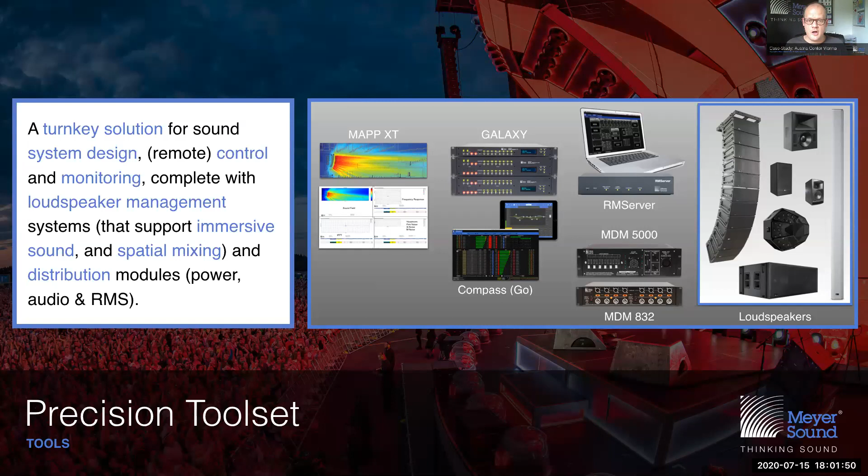And that means that we have another chapter that evolves around the precision toolset, which is our turnkey solution all the way from design to deployment, our turnkey solution for supporting the loudspeaker products. And that means that in today's case study, we get to see again the application of the precision toolset. And today's case study is the Austria Center in Vienna.

We have many guest lecturers, so without further ado, please allow me to introduce, starting with my co-host. Dennis, are you with us? Yes, I'm here. Thank you, Dennis. Dennis Tholema, Technical Service Manager International and fellow Meyer Sound colleague. Thank you for joining us, Dennis. As well as Michael Pohl, also of Technical Services. Michael, are you with us? Hello, everyone. Thank you for confirming. Happy that you're here, guys. You also brought some guest lecturers, namely Manfred Prochazka, who is the CEO of ATEC Pro, our Austrian distributor. Welcome to you, Manfred. Are you with us? Hello. Well, greetings from Austria and happy to be here. Thank you, Manfred.

And then the people that actually work at the Austria Center in Vienna, which is Ronald Wittenberg, Department Head of Event Technicians. Are you with us, Ronald? Hello, everybody. Thank you for the invitation to this event. Thank you very much. Thank you for joining us, as well as your colleague, Karsten Elsner, who is sound engineer at the Austria Center in Vienna. Karsten, are you also with us? Hi there. Nice to be with you. Excellent. Well, that means that we can start having our roundtable. I'm going to cancel the spotlight on me so that every time when you speak, we also see you. And let's start with a brief introduction of the venue.

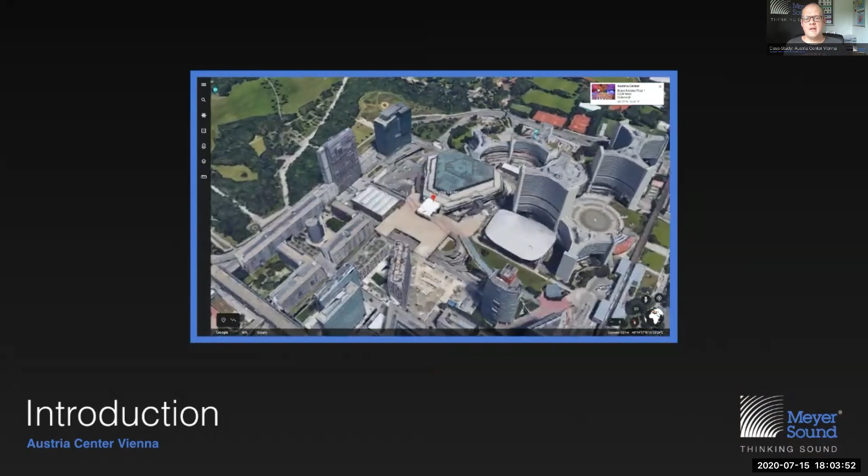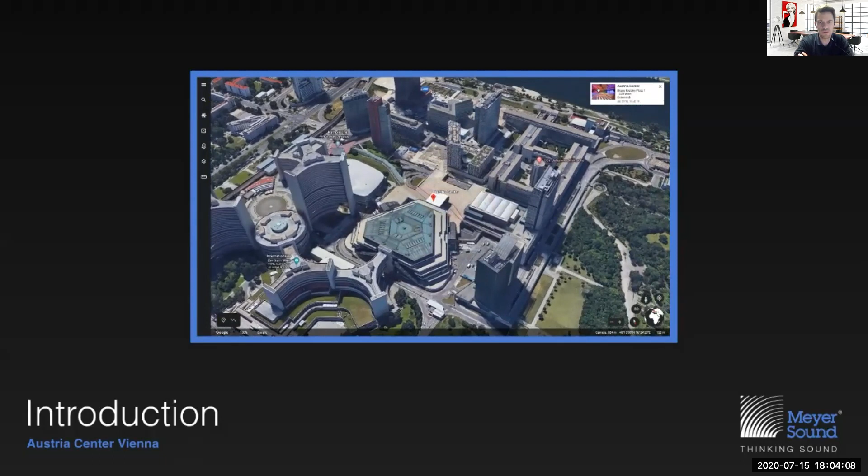Now, Vienna is not in Australia, so I think it's important that we make that clear, that this is a very important venue in the heart of Europe. So who would like to talk a little bit about the purpose and the facilities and the application of this truly unique building? Yeah, maybe I take over at this place. Be our guest. So the Austria Center Vienna was originally designed and planned for the UN. That's our neighbor. It was designed as a conference center for the UN, but then they got their own smaller conference center, and the Austria Center was taken over.

Today we have more or less a lot of international medical congresses in there. This is our main business, but we also have a lot of company events. It's all for bigger congresses. Our biggest congress, for the European Society of Radiology, has about 15 to 20,000 visitors. We have about 24 lecture rooms and about 180 breakout rooms. So it's a very big building with a lot of space in there. But we have a very small group of permanent employees. We have just 5 audio engineers, 3 light technicians, and 3 stage techs. And we have to handle a lot of business in there.

And our main reason why we are here is we have a new sound system installed last year, because the old sound system was more or less 30 years old. I took over in 2016, and I worked in the Austria Center also, I think, 25 years ago as an audio engineer. When I returned in 2016, I entered the main hall and said, whoa, they still have the same system they had 25 years ago, and it's still working. So it was a good system, but it was a little overaged, I think.

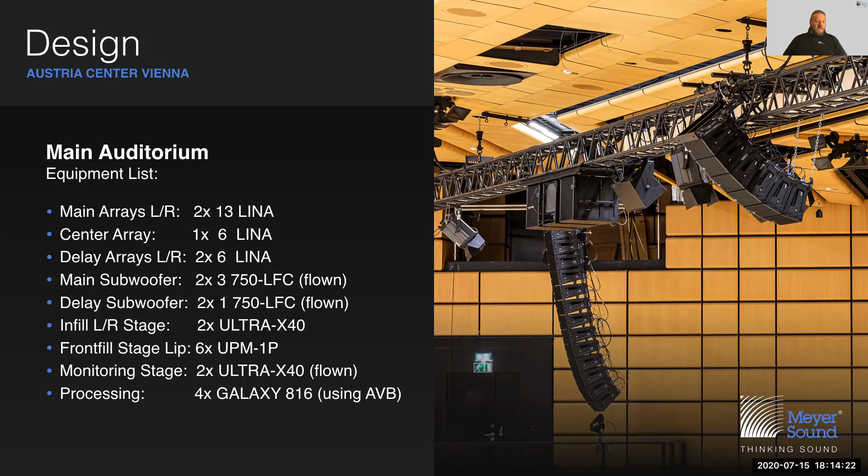That also enables the AV center and the techs to feed signals into the system on every Galaxy and share those signals with all the other ones. And that makes the system very flexible and gives the system lots of inputs. If you just imagine that each Galaxy 816 can receive 8 physical analog or AES signals. Well, AES, it's actually 4 cables, but 2 channels each. So 8 physical signals. And with 4 Galaxies, there's quite some channels that you can get into the system. But let's dive a little deeper into the design and let's check what it is.

So the throw of the system varies a little in regards to the fill systems. The main PA, of course, is on fixed positions. So the picture is taken from one of the very, very last seats in the very last rows. So we are looking now to the back of the stage with 65 to almost 70 meters. But let's take a closer look at the positions of the systems and the main purpose there.

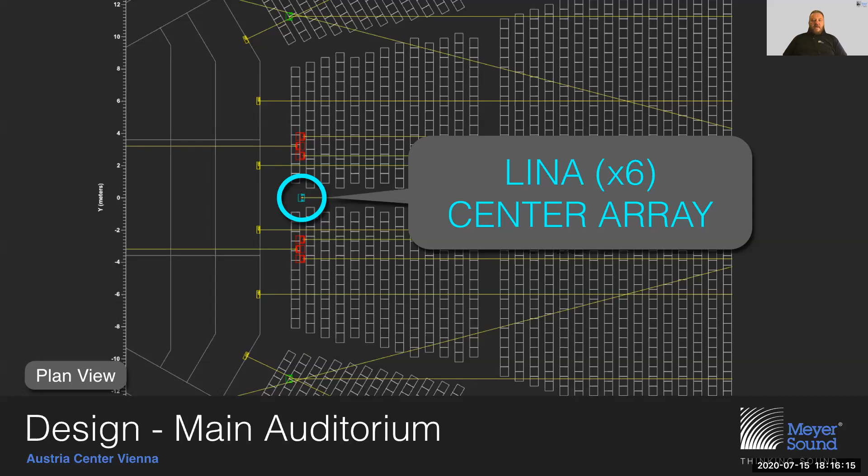Let's begin with the center, which comprises 6 LINAs. This center is not a real center as you would name it in a musical or theatrical world. So the center is not covering the whole venue and all the seats. It is a center fill to actually close the gap between the left and right systems. The center cluster is tilted pretty much downward, as we can see in the next slide here, to literally fulfill the requirements of making a nice transition from the very left to the very right and filling that gap there.

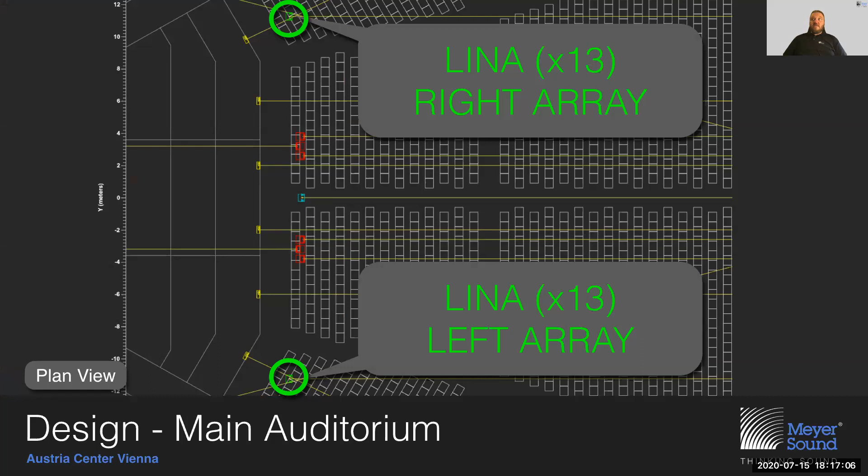In the next slide, we will see the main left and right line arrays, which I already mentioned, use 13 elements each side, which is still a pretty small system. What is interesting is that those systems are slightly turned outwards, so they're not 100% straight. Just also to cover the outer areas, as you saw on the first one, the room is what we call fan-shaped. So it opens up and it widens more and more as you get further away from the stage.

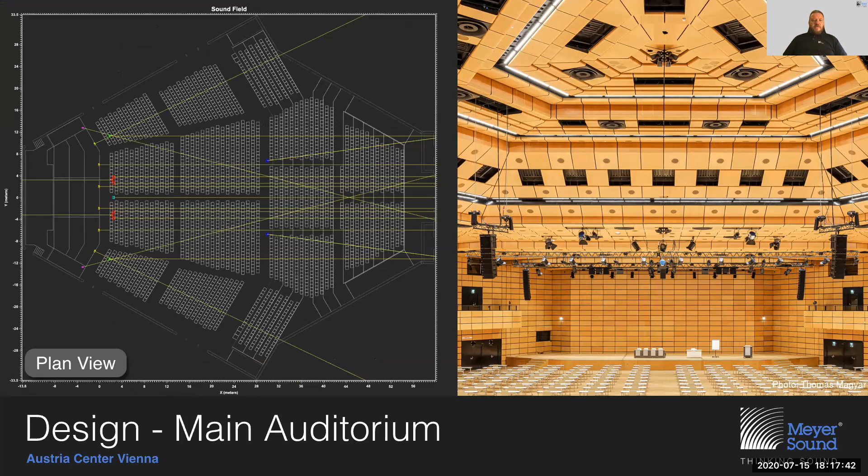Just to make sure that the coverage also meets the very outsides and the outer seats, those systems are not 100% straight. But also very important is that the transition between the left, center, and the right system is very smooth. And we took a lot of efforts to make this transition as invisible, or well, inaudible, so as smooth as possible so that you don't spot when you move from one system into the other.

But of course, yes. I also have to mention that basically the position of the left, center, and right was a given fact. There was a trim level that was desired because they have some gigs in there, some shows, some productions where they have a big video projection screen in the back of the stage that basically defined the left and right position of the main array and also defined the trim height of the center and all speakers that are suspended by the truss, so that at no point any speaker throws a shadow on the video projection. So that was one interesting thing.

Right, not just line of sound, but also line of sight. Correct. Yeah.

Important. I almost forgot about this one. For me, it's still audio first. Sorry for that. But thanks for adding that, Dennis. Of course, that was a very important point to make.

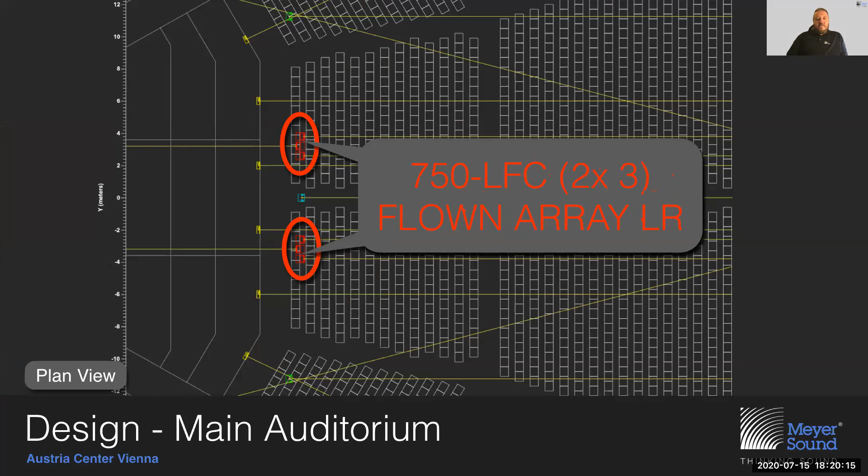As we've seen on the pictures before, of course, a couple of subwoofers are deployed because you want to have a linear frequency response all the way down to 35 Hz or around. In the design, we achieved this with 3 750 LFCs in a gradient cardioid array, a little bit spaced left and right out of the center, which was also given by the loading capacities of the main truss. But of course, you want to keep the stage clean, and you don't want to have disturbance on stage by some low end that you spill there. So that's why we decided to go for gradient arrays in this way, as you can see here.

On the next slide, you see the 6 UPM-1P front fill systems, which are covering the very first 2 to 3 rows in the venue. Because as you can see, the main array and the center are actually placed above the audience area, not above the stage. And as Dennis mentioned, those positions have been given. So a front fill system is very important. And what is also a very important point is that the fill systems that are filling those gaps have the same sonic signature and the same phase and frequency response, so you smoothly blend over from the fills into the main systems without any disturbance.

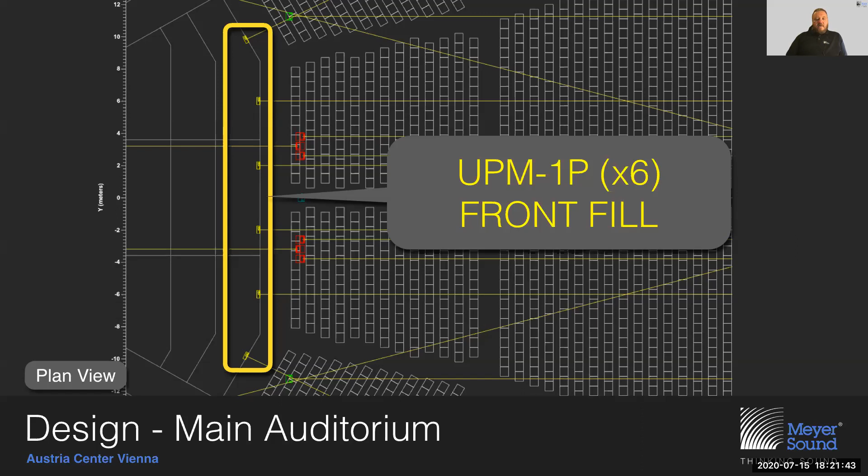As we will see a little later, this also could be read in the measurements from the consultant company, that this transition is really good and that the phase responses of all those speakers are matching, which we also achieved, of course, using the tools within our Galaxy network platform, for example the product integration for those systems to marry them all together, so to say.

For the outer sides, we also wanted to have a little stronger system because, as you can see, the audience area is also not straight in front of the stage to the outsides. It gets a little closer towards the rear wall because the stage is, I don't know, still trapezoidal, but yeah, it's a multi-edge stage. So for those applications, we decided for the Ultra X40s because of their wide coverage, so we can also anchor the signals closer towards the stage.

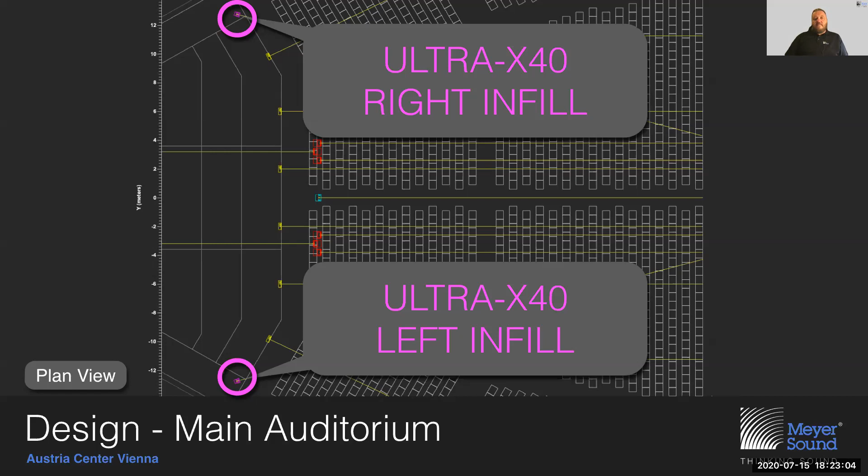You don't want to sit in the second row and see a presenter 4 or 5 meters away from you and hear him coming out of the roof. That's not very nice, and that also is very distracting in regards to concentration if you want to listen to a congress and stuff like this. And those events can take a long time. So that was also a very important part for us to bring the image, so to say, down to the stage. No shower sound. Yes, absolutely.

That's what it is. And also those Ultra X40s, I'd like to mention, Manfred, correct me if that's wrong, but I think those were the very first Ultra X40s installed in a venue worldwide. Absolutely. As I heard, not the first delivered, but the first installed X40s worldwide. Yeah, thank you.

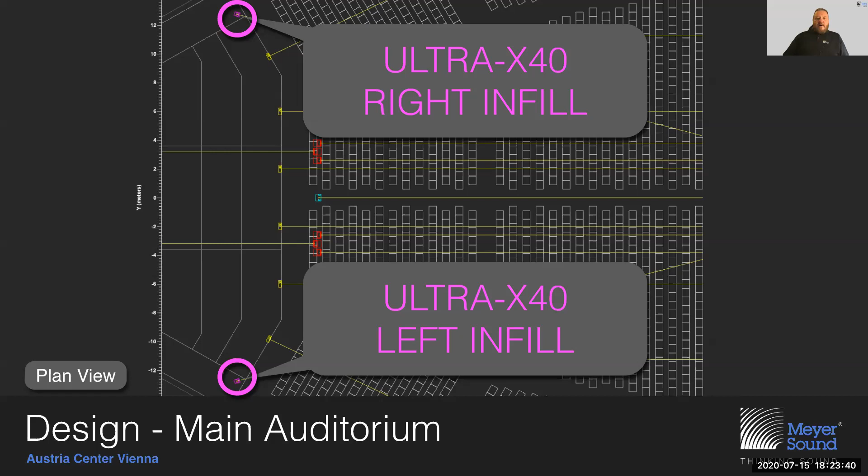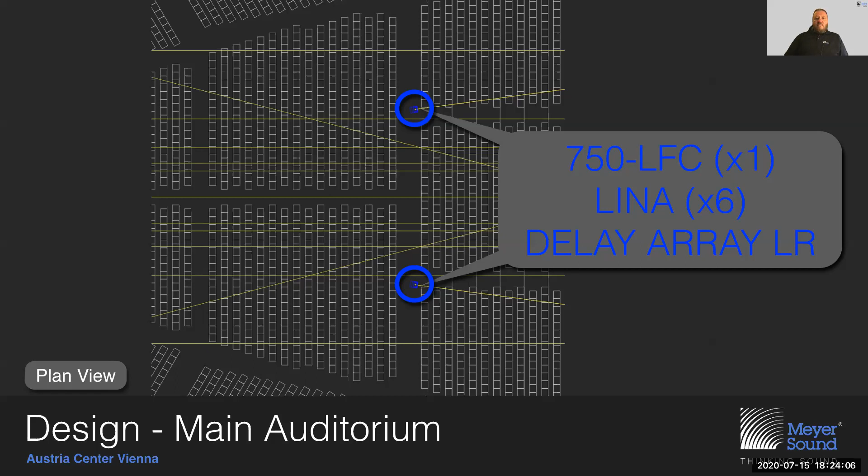Yes, on the next slide, we will see the positions of the delays, which is around 34, 35 meters away from the main arrays, but the actual coverage starts like 40 to 45 meters away from there. So we actually think about those systems more as a relay system than a delay system, which we will see when we are coming into the section view.

As we mentioned before, those systems have a flown subwoofer along with it because you also want to fresh up the low frequency energy a little bit, which is just in the nature of the systems and the wavelength. With the long arrays, well, 6 LINAs, that's a pretty long array, and that causes that you have control almost all over their full frequency response, which means you can shoot the energy pretty straight where you want them.

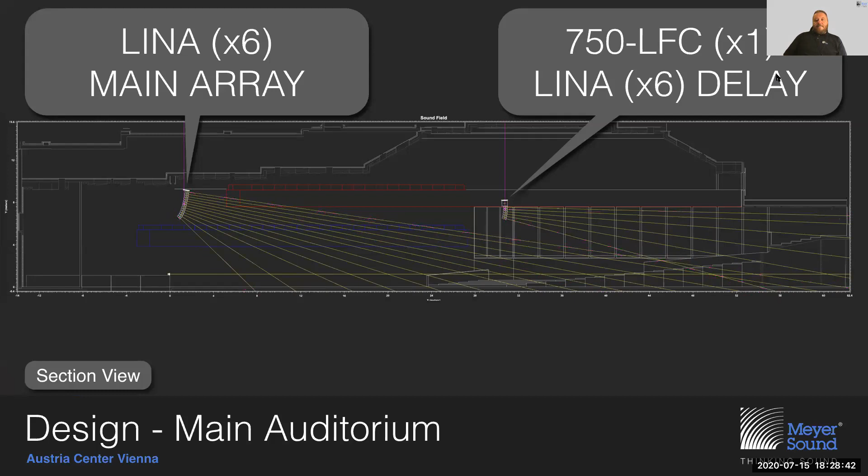And as you can see here, that's why we actually call this more like a relay system instead of a delay system, because you don't really want to fresh up the signal there. You're really literally taking over, and you have a special PA for the rear of the venue. In the next slides, we will see some predictions through a couple of octaves, just so you can see how the system is performing.

And just for those that are not that familiar with MAPP, if you see this edge of a 3 dB thing, that doesn't mean that you literally at this point are 3 dB lower in level, but at one point MAPP has to make the threshold between, for example, this yellow-green to the greenish color or the cyan color.

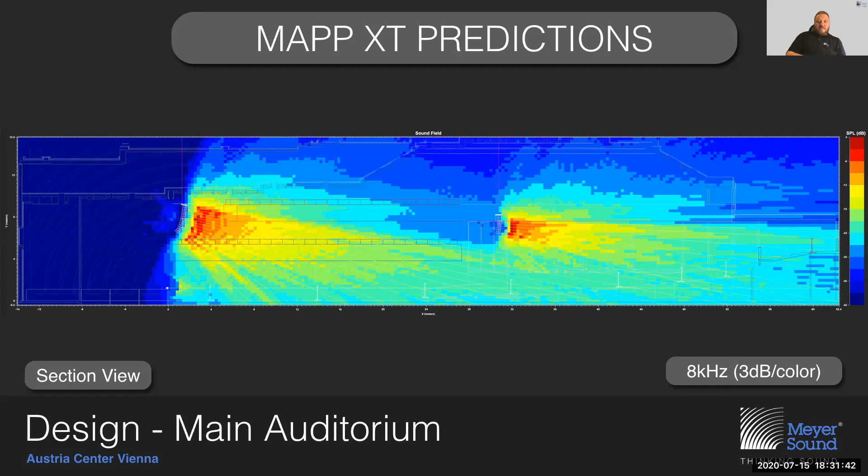Well, in MAPP, we already wanted to see the distribution and the differences in the frequency responses from the very front to the very back, because as you've seen, there were a lot of requirements, and those requirements are pretty strict and have small tolerances. And within the design process, we already wanted to make sure that the system fulfills all those requirements. And as you can see here, from the very front to the very rear, the variations are very, very small, and the frequency responses, or the amplitude response as we see here, is very similar all over those places.

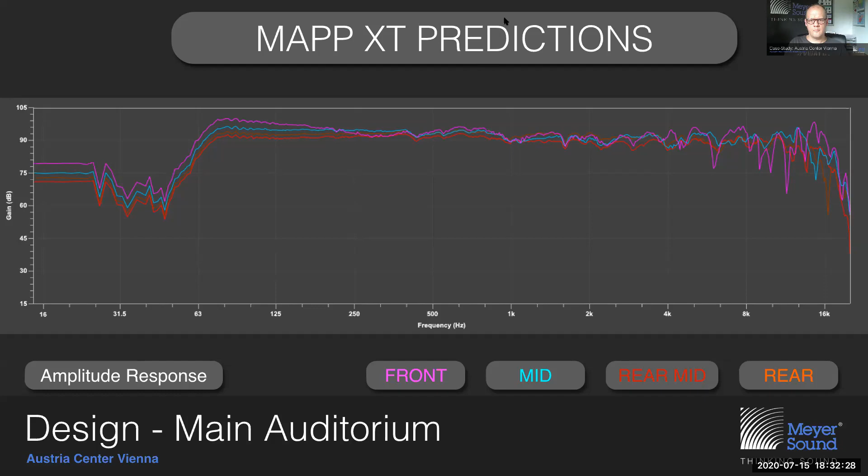So after the system has been installed, and we're not talking about the final installation, we're talking about the demo at the moment. So the Austria Center conducted those demos with different manufacturers, but each system was in for 1 day. So we installed it in the morning and presented a little later. Each system was measured and checked in regards to the requirements of the Austria Center, and of course, each system engineer or team of system engineers measured their own systems, and we of course also want to share that measurement data.

So important. You know, everybody had the same condition, so there was no argument about speaker locations. For example, if you have 3 competitors demoing speakers in the same room, but they all want to use the same location for the speakers, it's just not possible. So Austria Center made that decision to invite the different competitors on different days, so everybody has the same condition. So it's a fair demo for everybody.

Yeah, absolutely. The traces that you can see here now are actually the traces from the final calibration, but they are very similar to what we had in the demo. Otherwise, I think we wouldn't have won that pitch. But you see, that's real life measurements taken with SIM3, our own measurement tool. And the variations, of course, are looking a little more strange, we have a little more zigzags or gaps and little peaks in there than in the predictions, but the predictions are free-field predictions. And this is the real room. But as you can see, everything is very stable, and it looks very, very similar all the way from the very front, again, to the very back.

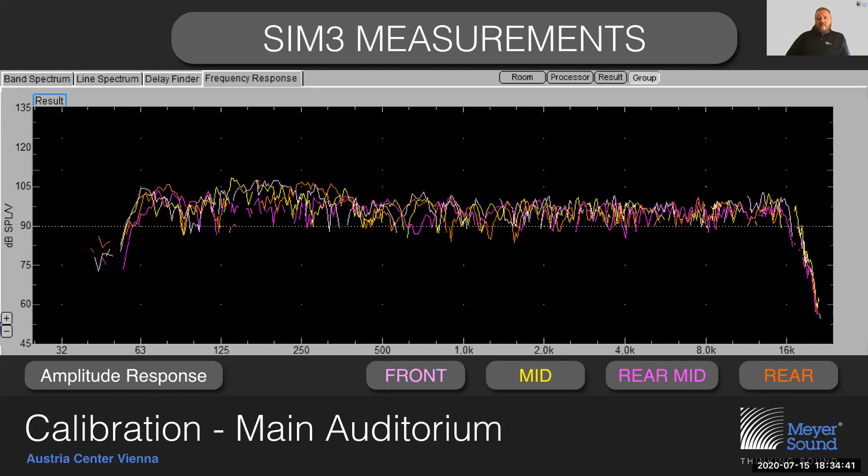And just to emphasize this a little more, in the next slide, we are actually comparing those traces. So you see on the top the real measurements made with SIM3, and on the bottom you see the measurements made with the virtual measurement tool or the measurement viewer within MAPP XT, both having the same resolution with 1/48 octave in the frequency range. And also the SPL scale is the same, as you can see here.

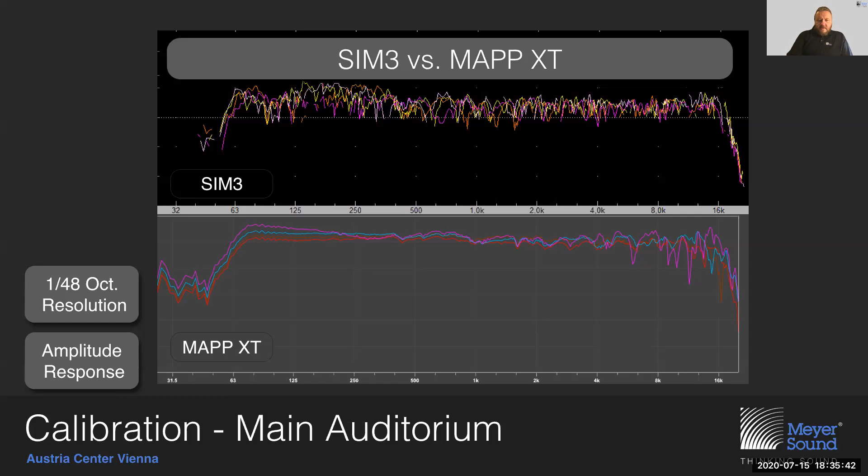But as we said before, in the whole procedure in the venue, there were measurements made by an independent consultant company, and those measurements need to confirm that the system is fulfilling all these requirements. Merlijn, can you advance one slide, please? Sure. And one of those very important things, especially talking about one of the biggest conference and congress centers in Central Europe, is of course speech intelligibility, and therefore the speech transmission index was one of the most important points to be measured. And Merlijn, do you want to give us a little more detailed information on what STI means?

Sure. Well, for starters, the absolute measurement of speech intelligibility is a super complex science. Speech is, of course, a very complex signal. That being said, speech transmission index, also known as STI, is a well-established objective measurement predictor of speech transmission. So it's an indicator.

It is an indicator that says if you have a high STI value, then you'll likely have successful speech transmission through your delivery system, which is the sound system, in collaboration with the room. And it's my understanding that part of the requirements was to ensure a speech transmission index of at least 0.6, which in the left-hand chart, which you can find on Wikipedia, puts you in the so-called D category. Notice that in the D category, you're looking at a nominal STI value of 0.62, let's say 0.6.

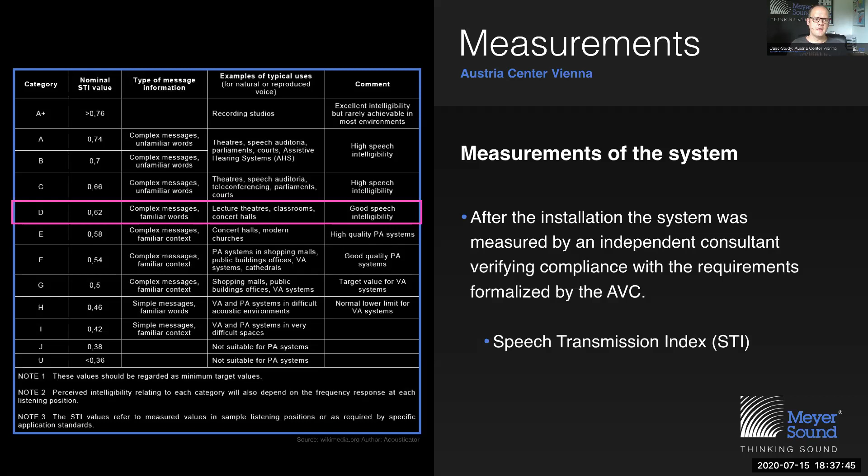And judging by the comments, this should suffice for good speech intelligibility in lecture theaters, classrooms, and concert halls, like the venue that we're discussing today. And this should suffice for complex messages using familiar words. But if we look at the objective measurement made by the consultant, you will see that very often we manage to get 0.7. And 0.7 is like 1/10 more than 0.6. It's a 10% difference, if you will, but it's the difference between a D category rating and a B category rating.

And it's considered a high speech intelligibility rather than a good speech intelligibility, suitable for theaters, auditoria, parliaments, assistive hearing systems, and more. And in terms of messaging, what has changed between the D and the B category is that the B category also allows you to transmit complex messages using unfamiliar words, which of course in a location like this, where you have an international usage of the venue and foreign languages being spoken, a lot of words might end up being unfamiliar. So having that real high speech intelligibility is mission critical in such an application.

And an objective consultant, tonarchitektur, has made the measurements of the existing system at the time, as well as of all the systems that were demoed, which led to the following values. And if you look into the matter, it's actually an IEC standard, an International Electrotechnical Commission standard. These values turned out to be the same for both male as well as female speech. And the value that was requested was 0.6 or more. And if you look at the previous system that Ronald talked about at the beginning of the presentation, then we have values that are actually less than 0.6, depending on where you are in the audience.

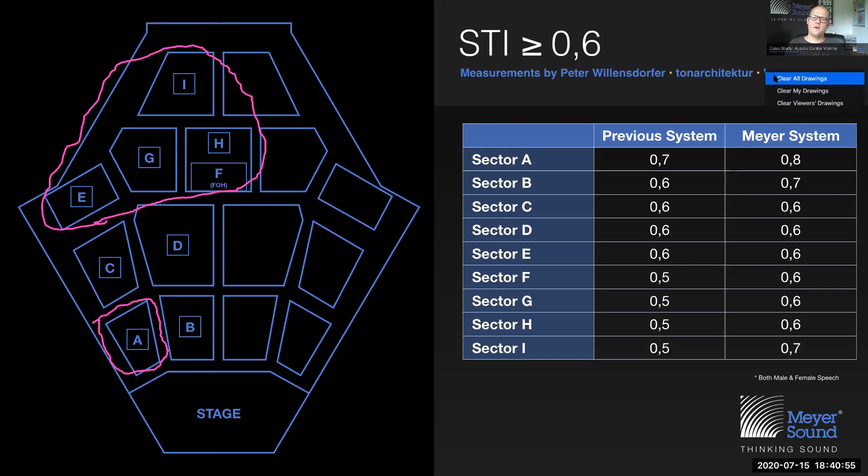And you can also see the payoff of using the Ultra X40 as infill, because this sector in the audience, which is your A sector, used to be 0.7, but by having the presence of the Ultra X40 in that part of the room, we gained another 10% in terms of speech intelligibility. And this is kind of independent validation. It's an indicator. It's a well-established objective measurement predictor of how likely speech transmission is expected to occur. And that was critical in the decision-making process that led ultimately to the commissioning of this system. Ronald and Karsten, if you have anything to add to my brief explanation, by all means.

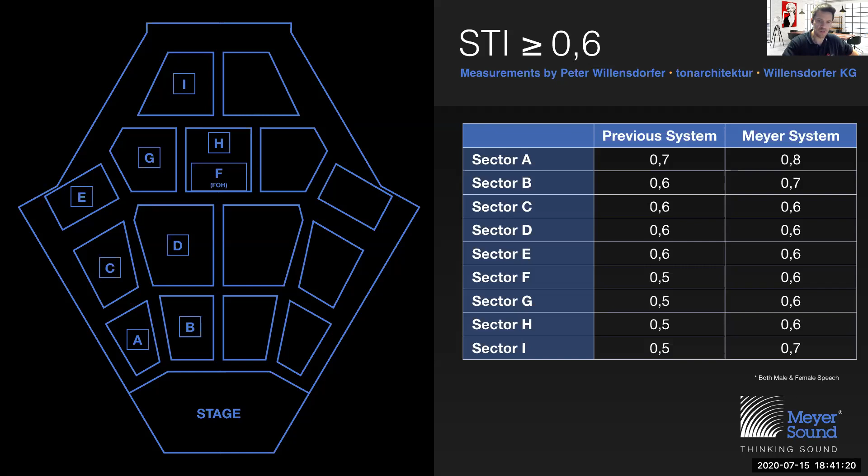I just want to point out why this is so important. Like I mentioned before, most of our congresses are medical congresses. So they are very detailed in what they have to tell their guests, what they have to tell the audience. And so it is very important that they get all the information out of the keynotes. And it's also important what Dennis told us before. We have to really take care about the sightlines and things like that.

This was the reason why we had to define the points where the PA system, where the speakers could be mounted, because of the presentations. They want to show their scientific presentations, and it's very detailed in all these medical congresses. So this is a very important thing, and we have to really take care about it. Yeah, thank you. Because as I said earlier today, the absolute measurement of speech intelligibility is a complex science, but surely the improvement was not only measurable, but also audible. Is that something that you already feel comfortable talking about at this point in the webinar?

Did the measurement predict improved speech intelligibility? Was it in good agreement with your personal experience? It definitely did. The words are way clearer, way better to understand. And yeah, we're pretty happy with that. And so is the feedback I get from the audience.

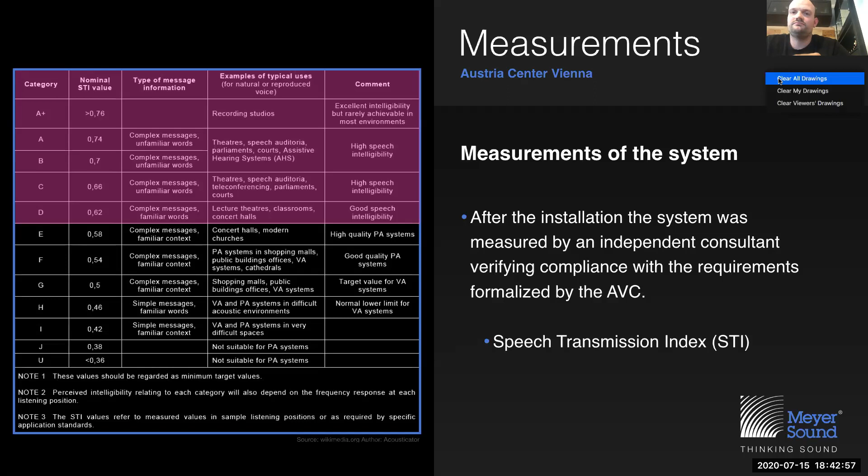Excellent. Okay, well, that concludes my contribution on STI. And that means that we have a couple of impressions for our viewership to get a sense of scope and scale. And this is also where I invite all panel members to join me in the round table and talk a little bit about what we see in the photos in relation to everything that we've been discussing so far.